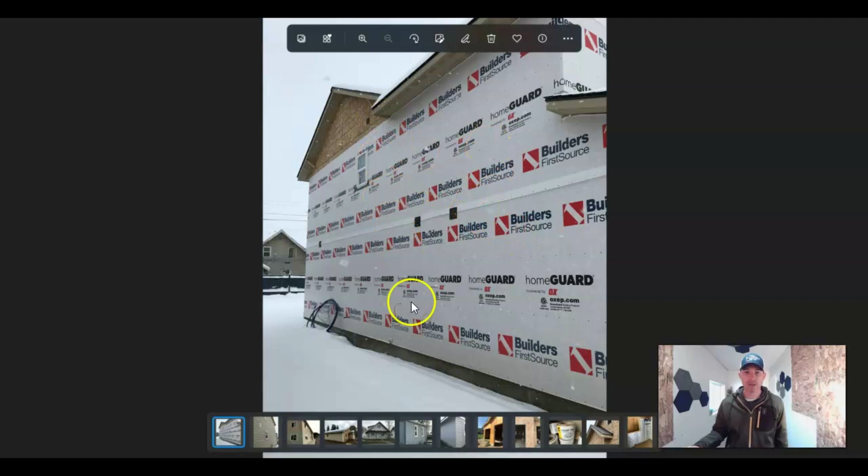So I'm going to start off by going through a bunch of pictures, and then I'll touch a little bit on the code to have an idea what I'm talking about. Pretty straightforward stuff, right? I mean, most people have seen building wrap. You probably heard the term Tyvek building wrap. So here they've installed building wrap over their sheathing, and they made sure to lap it correctly. You do the bottom first and then the top so that everything flows down in case water ever gets in there.

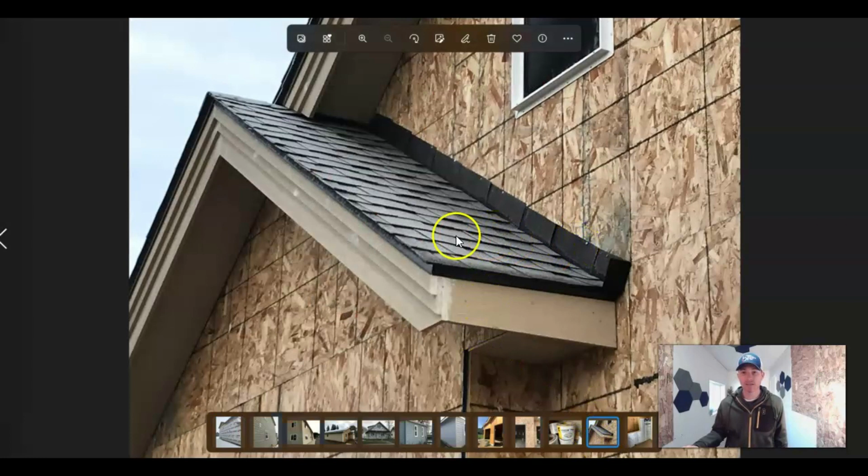When it comes to flashings, you've got a roof to wall flashing. You're going to want to run this flashing and then side over the top of it, so that'd be counter flashing it. One of the biggest parts that I catch is this little piece right here. You have a transition from the end of a roof into siding. This will get building wrapped and then siding will be put up here. Water could run down right along here and go right behind the siding unless you remember to put this little kicker where you bend your roof to wall flashing, so that anything that comes down will hit and come off the roof.

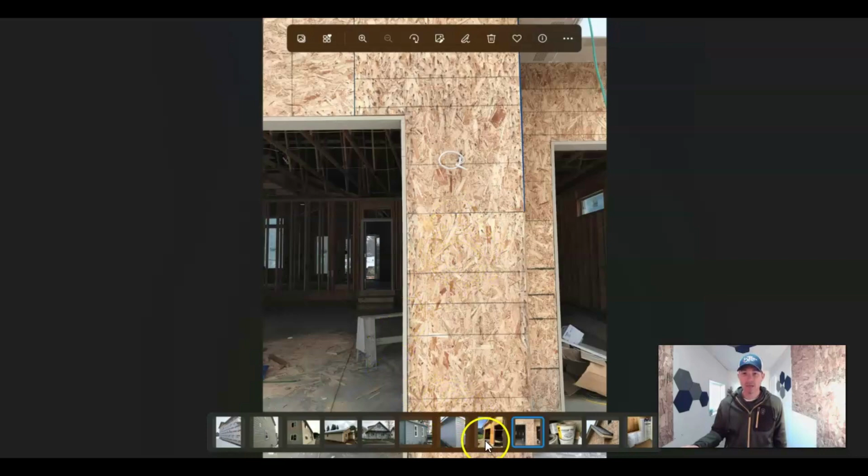And the siding would then side around this and over the top of that, and then it would be sealed. You might put a little bit of caulk in there, some type of sealant, to keep critters or other little things out and seal it up really nice. You're going to end up putting up some type of sheathing, right? So you might have OSB sheathing, maybe plywood sheathing, or maybe you're using just a T111.

That gets painted, it gets flashed, and it's done. You just make sure you install it per your installation instructions from your manufacturer. Same would be true for any other siding, right? I wouldn't want you to lose your warranty because you didn't caulk specific areas or provide enough spacing between laps or something like that. Just make sure you install it per your manufacturer's installation instructions.

So exterior coverings, making sure that you have not only the building wrap in case you get penetration through the siding, right? It's a water resistant barrier, but you're also wind resistant, right? You're making sure that whatever you put in there is providing you with good wind resistance so you don't get a lot of penetration through cracks and crevices.

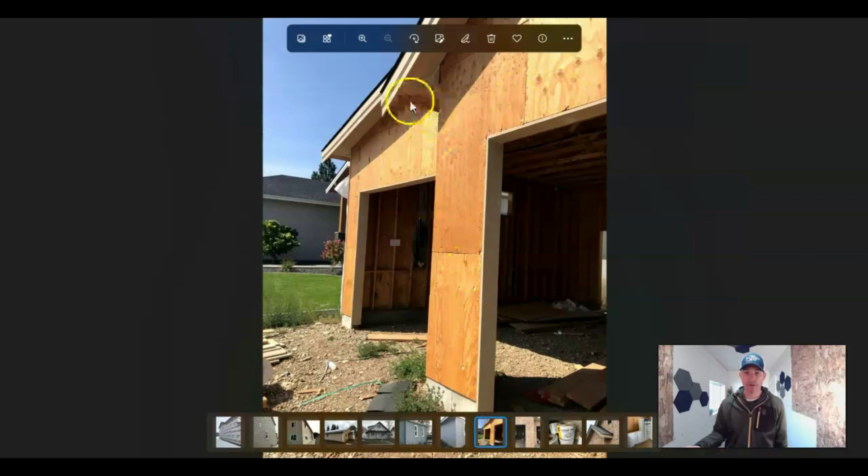But here they had sheathing, and then here they just have the T111, which would be back to this picture right here, right? So this might be lap siding, and this would just be the T111. So just make sure you get whatever material you're going to use for your sheathing put on, right?

Go back to just that assembly component of it, right? It's drywall, it's our stud framing, it's our insulation, and then it's our building wrap, right? That's our water resistive barrier. And then we get whatever our exterior cladding or siding is, right? Whatever that is that you choose, okay?

Again, make sure you install it per your manufacturer's installation instructions, and then you should be good to go as far as meeting the requirements for an exterior covering. Sometimes it might be required to be painted, maybe it's not, right? I mean, most people paint their house, but maybe there's an instance where you don't need to.

When you get into bricks or concrete or something like that, you don't necessarily have to put up a building wrap. That whole thing is going to be water resistant and wind resistant. It's going to meet the requirements if it's installed properly. Now, what about other materials? What if you're putting up like foam insulation around the house? Maybe you want a little extra R-value, and it's already got a foil back on it.

Maybe you can just go and tape the seams. It's nice and clean. You've installed it nicely. You don't need a building wrap. Maybe that meets the requirement. Or nowadays they have plywood that actually has a spray on it that meets the water resistant barrier requirement. It does not require a building wrap.

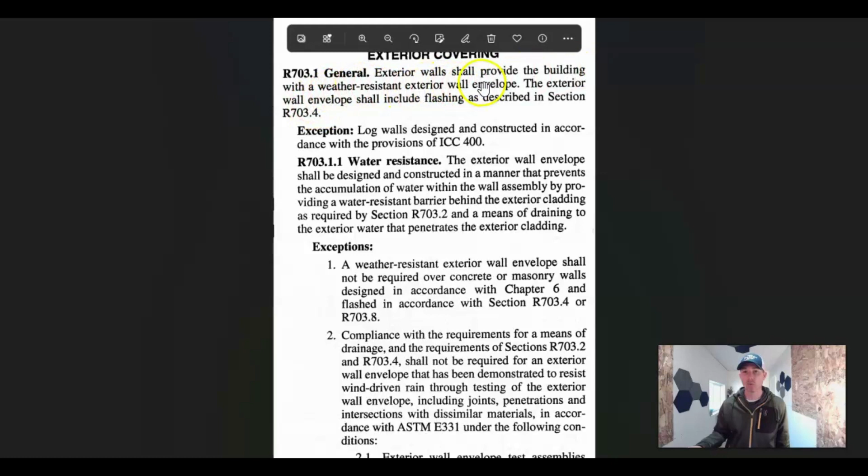Let's dive back. Let's look at code a little bit, just so you kind of know where I'm pulling my materials from. So here we have exterior coverings. Says exterior wall shall provide the building with a weather-resistant exterior wall envelope. The exterior wall envelope shall include flashings. So that's kind of what I talked about.

You want to make sure you get all your flashings in there, and you're taking into account if water or snow or whatever was to end up on this roof and it was going to melt and run off, it's not getting behind my siding. Where are most of those situations? It's going to be at windows, doors, and at those roof to wall transitions, right? So you need to make sure you get those flashed really well.

Get your window tape up around the windows and the doors. Get your building wrap up. Make sure everything flows down. So if water ever gets in there, it can find its way down and out. I think you should be covered. I think you'll be just fine.

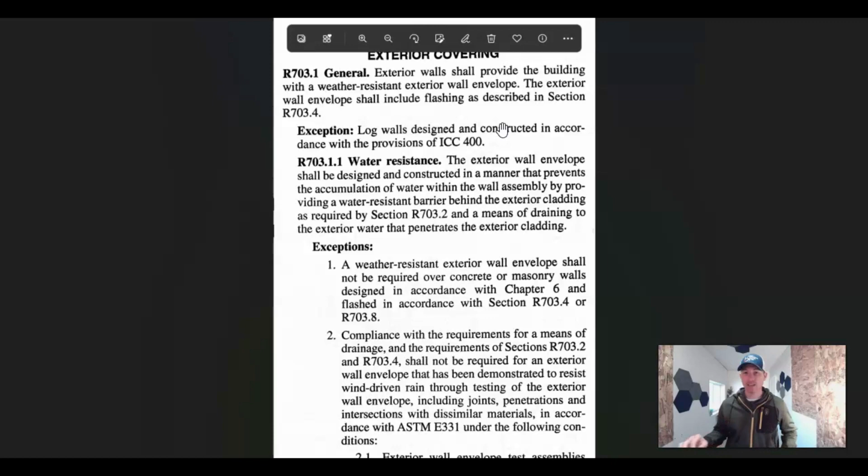So it says exterior wall envelope shall be designed and constructed in a manner that prevents the accumulation of water within a wall assembly by providing a water resistant barrier. There's your Tyvek building wrap behind the exterior cladding as required by section R703.2, and a means of draining to the exterior water that penetrates the exterior cladding.

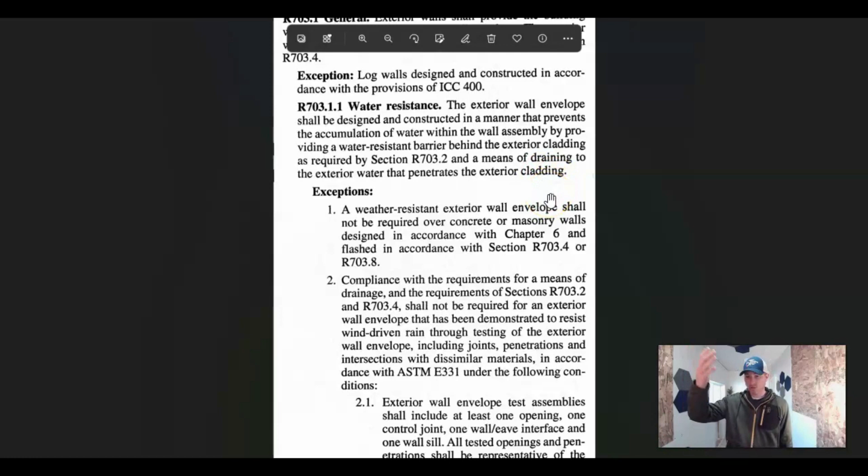Just means install it so everything flows down, it'd go down and out, and it'd fall out between the two, the siding and the building wrap, and you should be fine. Hopefully water never gets in there and it's a non-issue, right?

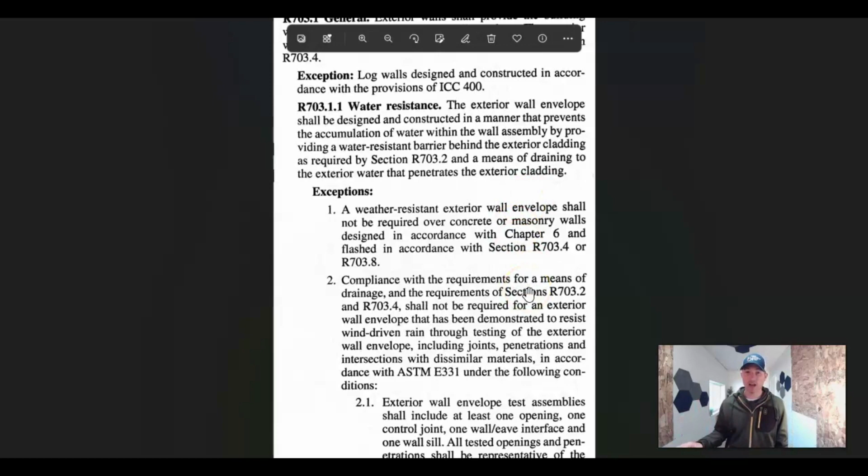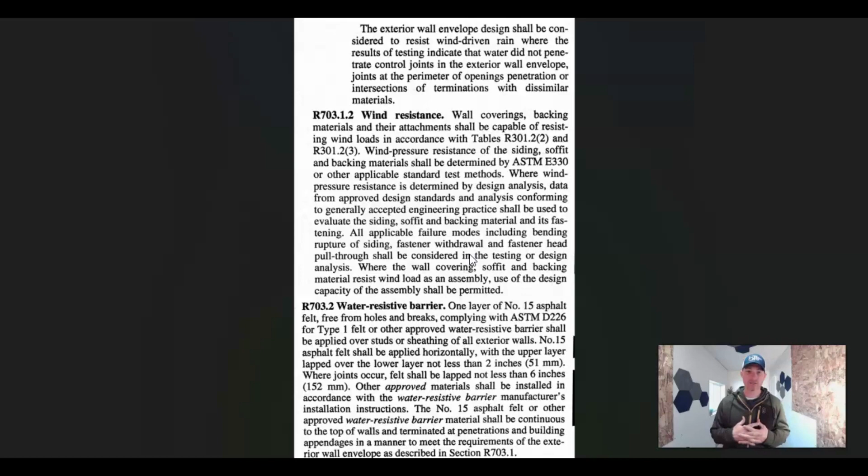Let's see here. So they're just making sure that it's wind resistant. So it's just applied so that it will not bend or rupture or break in case of high winds, right? So you just install it per manufacturer's installation instructions. Take into account fasteners. As a homeowner, sometimes you just go to the store and buy whatever you see there.

But think about, okay, well, what size nail do I need? What size screw do I need? Does it have to be a certain thickness? Does the head on it have to be big enough? For siding or roofing, right? They use a bigger head nail versus maybe a framing nail or a finish nail. So take that into account when you're thinking about all components within your project. Just make sure you're using the proper fasteners.

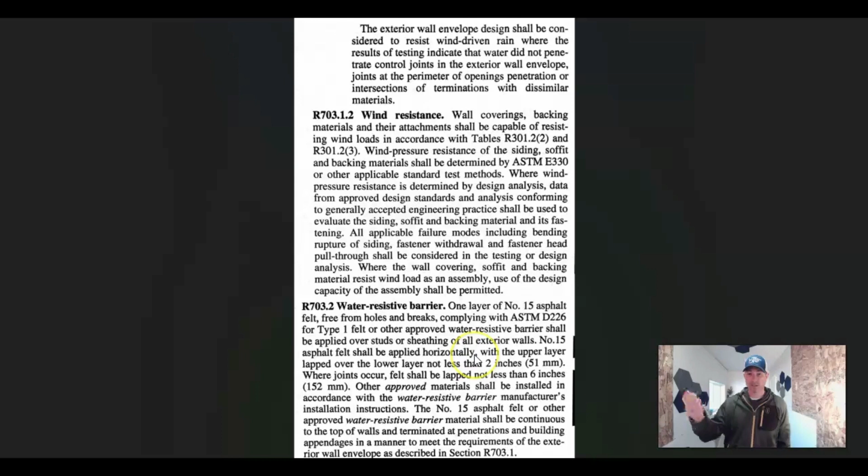Here they're talking about the different types of water resistant barriers. So one thing I didn't mention is, back in the day, they used to just use asphalt felt, like roofing felt. So here they're telling you you can still do it. One layer of 15-pound asphalt felt, free from holes and breaks, complying with the ASTM, and then you just want it to flow down, right? Here they're requiring you to lap the lower layer by 2 inches minimum.

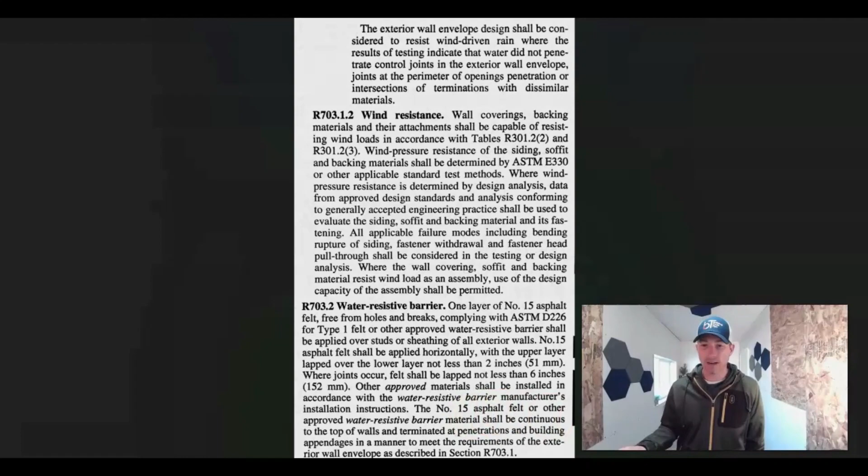That's pretty straightforward. If you want to use that, you just install it around the house. You do the lower layer first, 2-inch overlap, and you just wrap it around the house, staple it off. Again, you've met that requirement. That's something you could do if you've got a bunch of that laying around your house. Maybe you redid your roof. You should be covered.

So when it comes to exterior coverings, I think everybody knows you're going to put up some type of siding. You're not going to leave plywood or OSB to rot or just get beat up by the weather, right? So just follow typical installation, especially for homeowners. Keep it simple. Put your building wrap up, wrap around your windows, get your flashings on there, and then just put up whatever siding you're really excited about, and that'll make your house look awesome, make your addition or your garage look awesome, get it painted up, and I think you'll enjoy it.